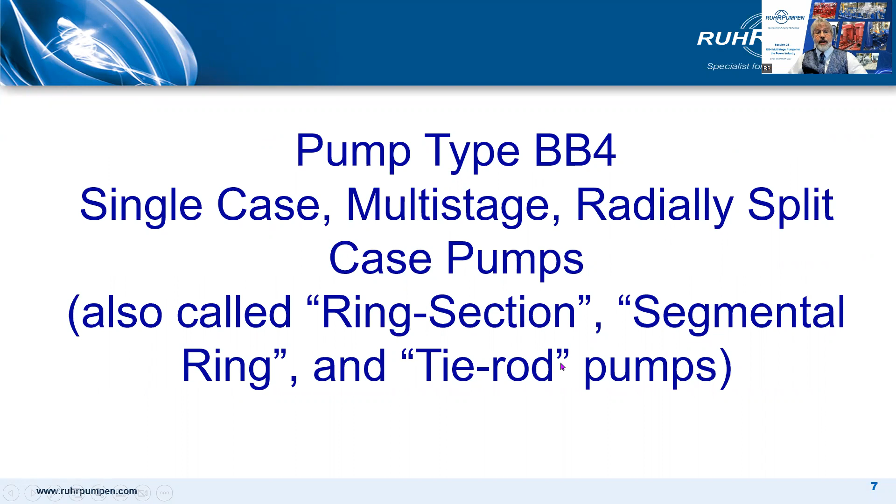BB4 pumps, described in API 610 as single case, multi-stage, radially split case pumps. But they're also popularly known as ring section pumps, segmental ring pumps, and tie rod pumps. Here's a photo from a recent order, and you can clearly see why it's called a ring section pump or a tie rod design.

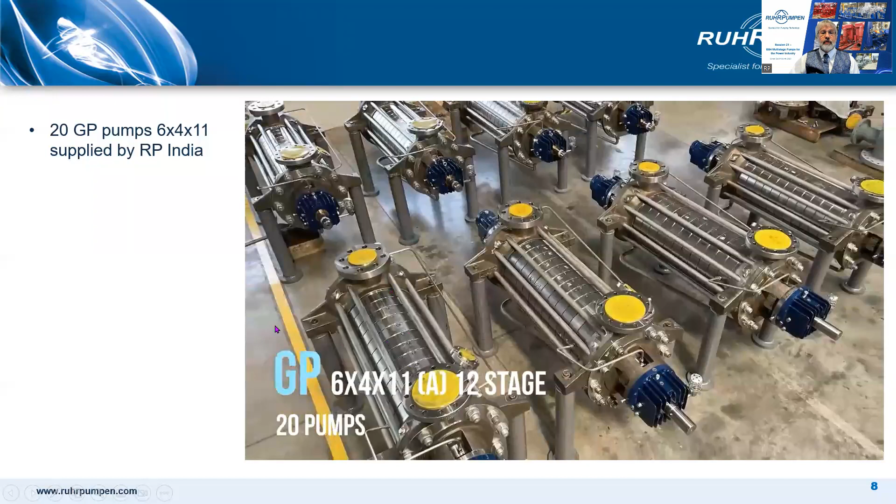Before I look at the design of these pumps in detail, I want to talk first about the industry in which they are so prevalent, the power industry, as boiler feed pumps, particularly combined cycle power plants. When you understand the market they're going in, you'll better understand the design features we've built into them and why.

In a single cycle gas plant, a gas turbine burns natural gas and drives a generator to produce electricity. The hot exhaust gases go to waste. There's no waste heat boiler, so no boiler feed water pumps. In a combined cycle power plant, a gas turbine generator generates electricity and the waste heat is used to make steam to generate additional electricity via a steam turbine. And this last step enhances the efficiency of the electricity generation no end.

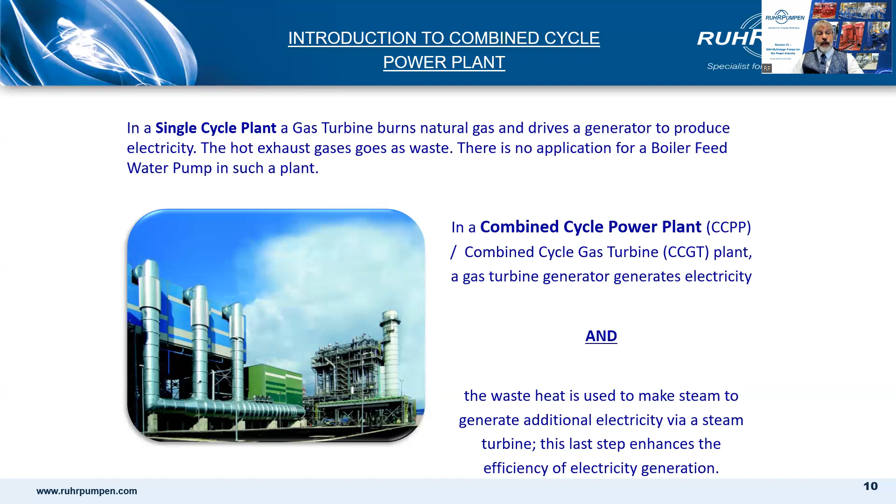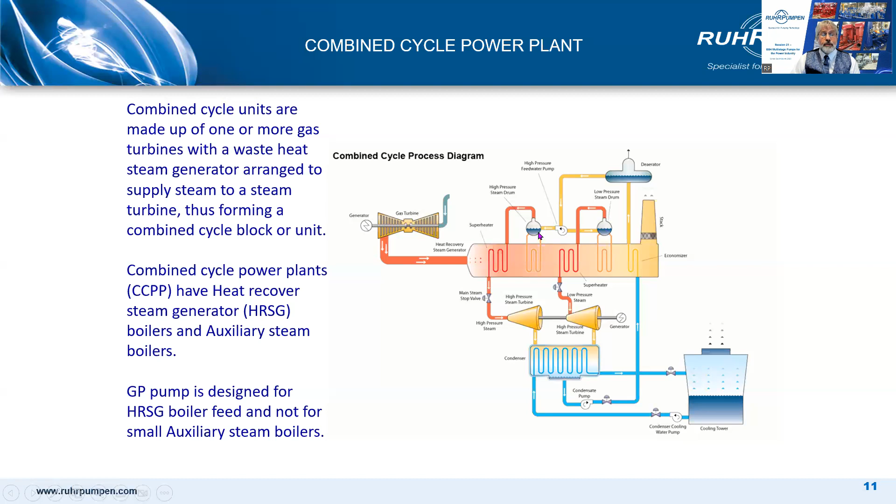In a combined cycle power plant, the exhaust gases go to the heat recovery steam generators, which are fed by boiler feed water pumps. And generated steam goes to the high pressure and low pressure steam turbines, which generate additional power. The exhaust steam is condensed and goes round the circuit again. Note the high pressure and low pressure steam circuits are fed by the same pump. Now we'll cover that later.

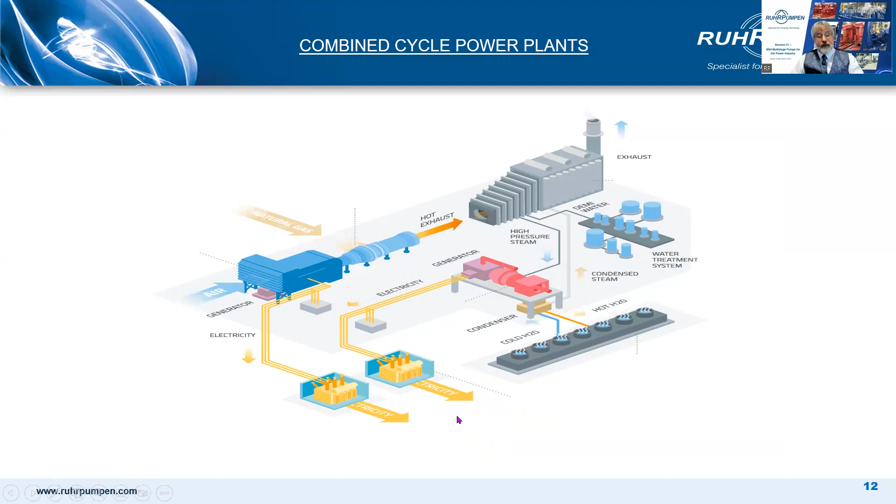Here it is schematically. Air and natural gas go into the gas turbine, which generates electricity. The exhaust gases go to the heat recovery steam generator. High pressure water goes in, steam comes out to the steam turbines, which generate more electricity. Well, that's it in a nutshell.

Combined cycle gas plants are increasing in popularity. They're more efficient than coal-fired plants. Modularized plants are available almost off the shelf and are considerably cheaper than coal-fired plants. And they're politically popular in times when the world is looking at reduced emissions.

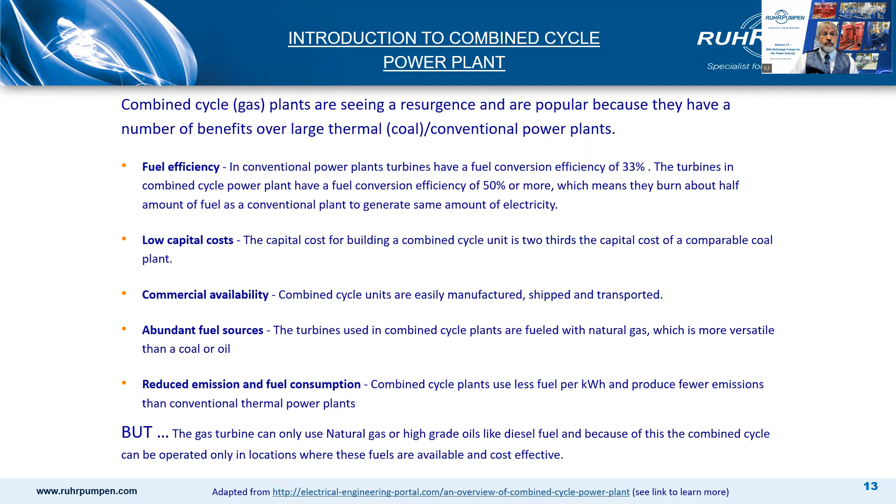I'm not going to play this video now, but here is a link to a short video which runs for about 3 minutes and gives you a good overview of combined cycle power plants.

So what is a boiler feed pump? It's a high pressure, multi-stage pump that runs continuously to pump feed water to the heat recovery steam generator. Usually it will be a BB4 pump, as we're describing in this presentation. It can be a BB5 pump, which is a double case barrel pump, you'll remember. And this may be specified by some customers, particularly oil and gas companies like Shell, Exxon, or Linde.

Traditionally, on baseload plants, the feed water pumps run continuously with few starts and stops. But increasingly nowadays, gas-fired power stations are used as peak shavers alongside renewable energy plants. And so they're seeing far more frequent stops and starts and thermal cycling. This is a more exacting requirement for the pumps to be designed to withstand.

Normal material of construction is C6 due to strength and corrosion resistance, but as you see, they're also available in other materials. It's not a difficult or exacting sealing proposition, so normally a single seal with a Plan 23 flush piping is used. Plan 23, you'll remember, is continuous recirculation from the seal chamber through a heat exchanger back to the seal chamber.

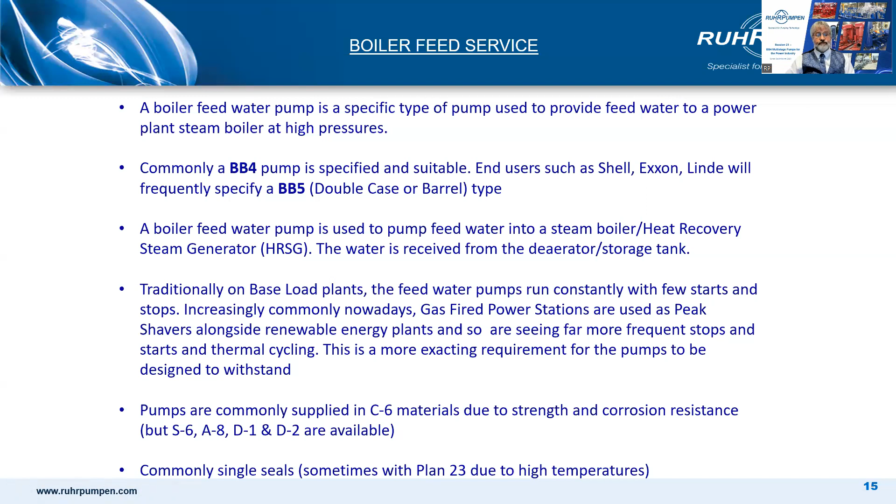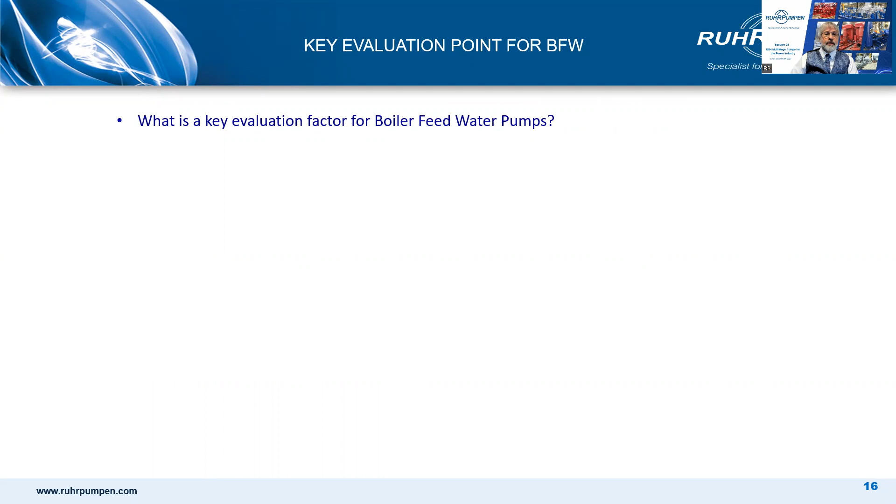What is the key evaluation factor for boiler feed water pumps? Efficiency, every time. Better efficiency equals more electricity equals higher profit. Efficiency and life cycle cost will frequently be more important than the capital cost of the equipment. So efficiency is most critical. But I want you to think about two different concepts of efficiency: high initial efficiency and high sustainable efficiency.

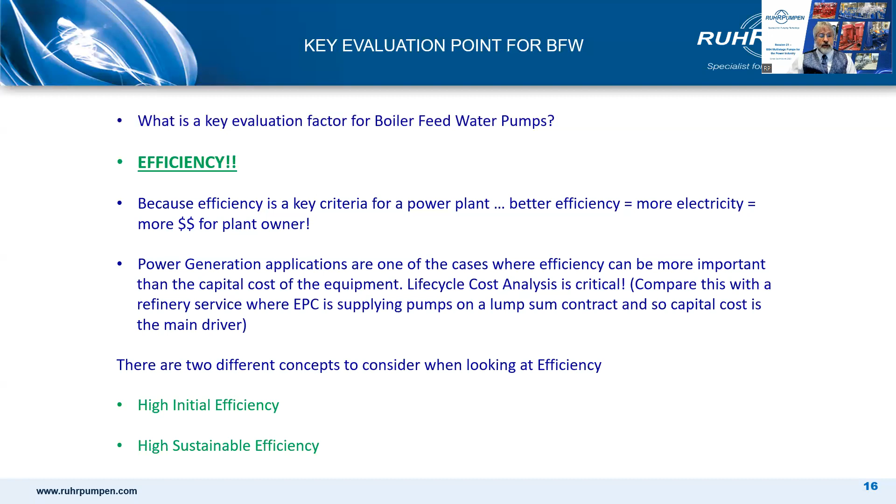Let me illustrate this by an example. I'm going to show you two different pump selections. The first one has a higher specific speed, higher number of stages, 13 in this instance, and a longer, skinnier shaft. Efficiency 81.7%. The second has a lower specific speed, fewer stages, 8 in this instance, shorter, more rigid shaft, and apparently a lower efficiency of 78.7%.

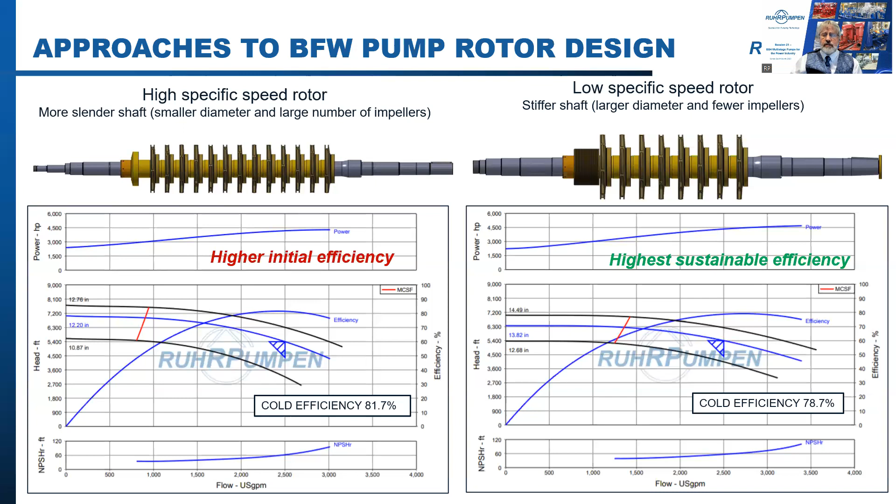Which one do you buy? Well, if you're an EPC with a lump sum turnkey contract, it's a no-brainer. You buy option 1. If you're an end user or a consultant looking for the best long-term solution, you'd be wise to say, hold on a minute, let's look at this a bit more. So let's look at it a little deeper.

Here on the left is the high specific speed rotor. It has a longer shaft span between bearings, skinnier shaft, more shaft deflection or sag when at rest, and is more likely for the wearing faces to touch during startup or rundown. It's reliant on the Lomakin effect to effectively reduce the effect of the shaft sag. Lomakin effect? I'll come to that in a minute.

Here on the right is the low specific speed rotor. Shorter bearing span, bigger diameter, stiffer shaft, less sag, less dependent on the Lomakin effect. It's what they call a non-contacting rotor, and this is a term you will see in specifications.

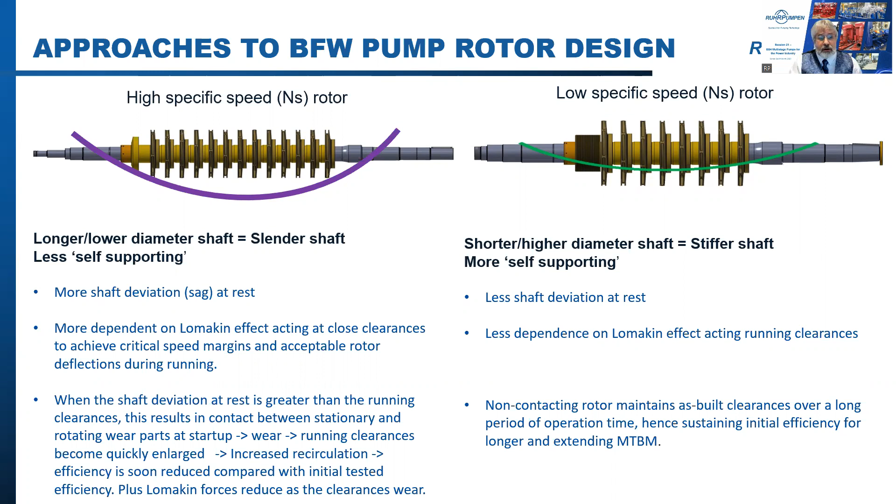So what the hell is the Lomakin effect? It's another of those terms, like Bernoulli, that has pump people looking wise and nodding sagely. Meanwhile, others with less theoretical knowledge say, what? Well, here it is in a very simplified form. If you're a rotating equipment engineer, then you ought to read up on this and Bernoulli while you're at it. But this will do for most of us generalists.

In any wear ring or bushing with differential pressure, there'll be axial flow passing through the clearance. If the rotating part moves away from the center of the stationary part, there'll be different clearances on each side. So when you get sag, you've got bigger clearance at the top, smaller clearance at the bottom. The side with the greater clearance will pass more flow than the side with the tighter clearance. More flow passing through the clearance will result locally in a higher velocity, and hence the effective local pressure will be lower. So you're going to have lower pressure at the higher part of the rotor.

Now this effect tends to be stabilizing. The force of the lower pressure on the side with a larger clearance, at the top in other words, and higher pressure on the side with a tighter clearance at the bottom, make the rotating part want to move back towards the center. In effect, the wear ring or bushing becomes a stable bearing. This reduces the chance of rub even with a flexible rotor, but not at startup and rundown. This is when wear rings and bushings might touch.

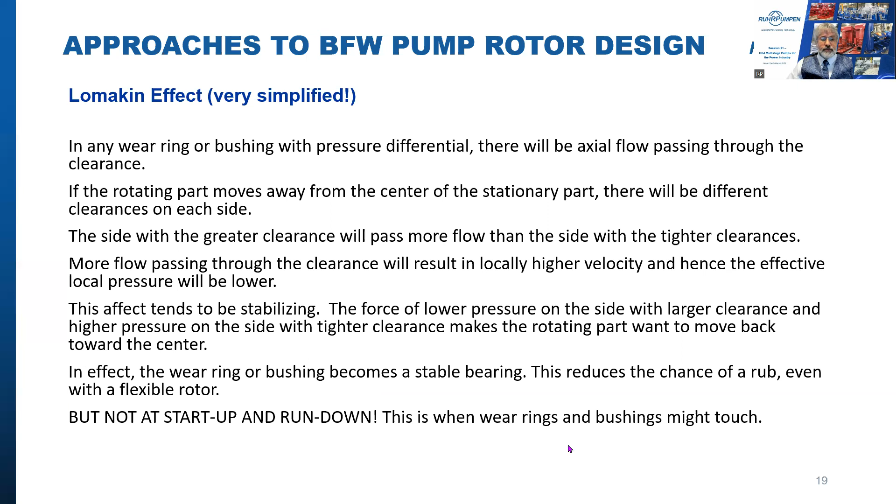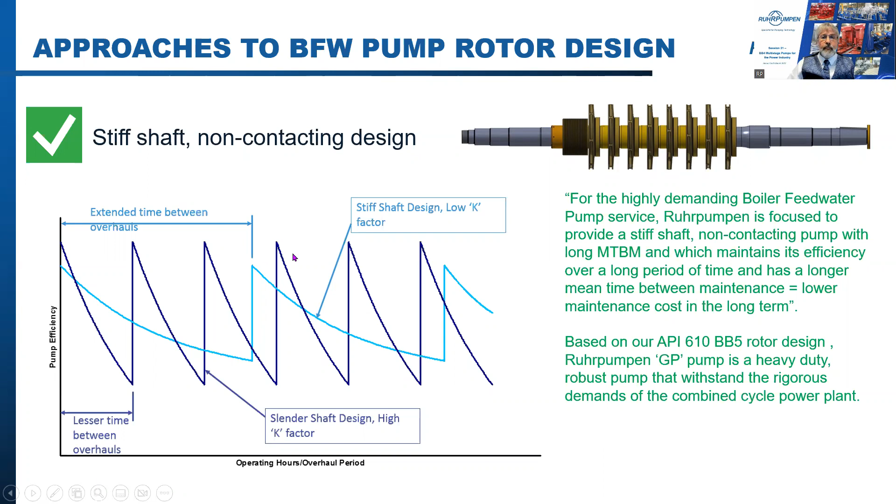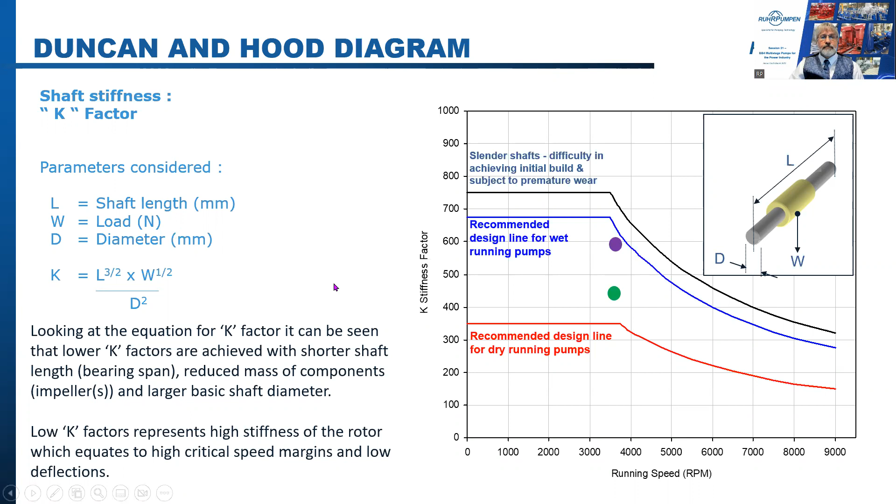Again, to reiterate, the lower the K factor, the stiffer the rotor, and lower the shaft deflections. Hence, a non-contacting rotor is what we're looking for. Well, that's the difficult bit over. Let's move on to the pump design and features.

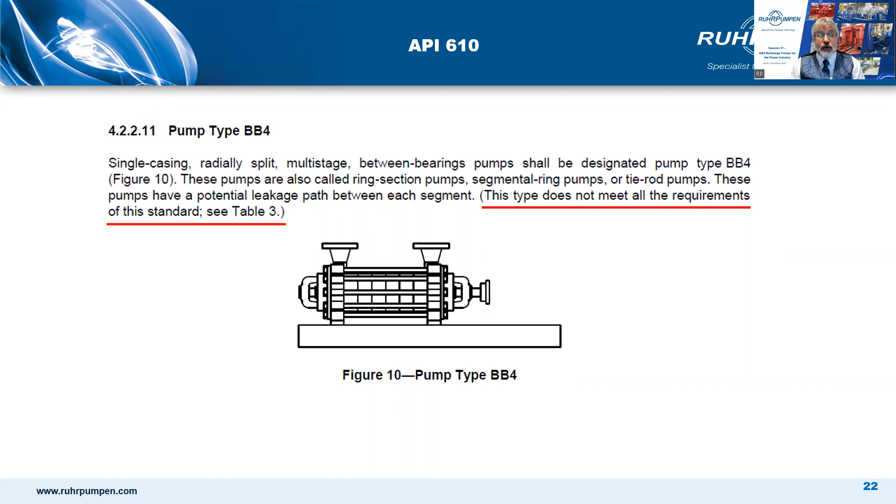Firstly, what does API 610 say? Well, a BB4 pump is not fully compliant with API 610. This is generally fine as we're pumping hot water, not hazardous hot hydrocarbons. Most specifiers don't require API 610 compliance for boiler feed water pumps. So we start with a build that is fit for purpose and still gives you a high quality pump without unnecessary and costly features.

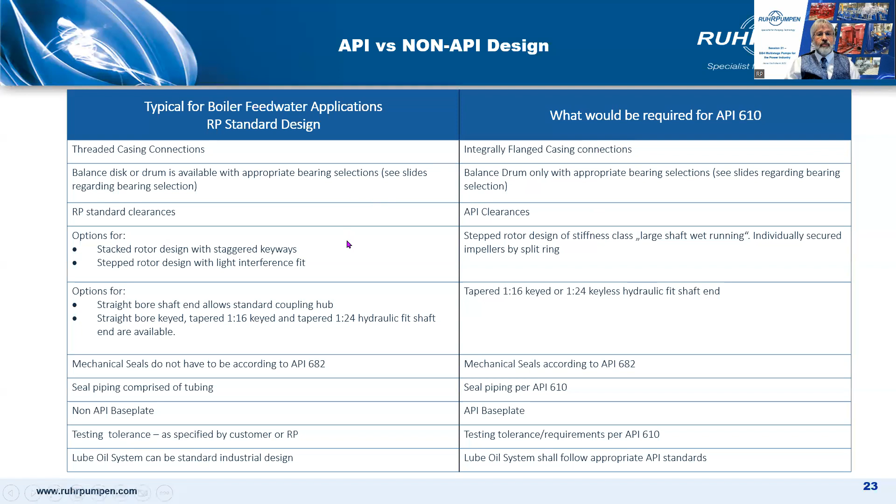Well, this is the Ruhrpumpen model GP pump for boiler feed water service. It's based on our market-leading BB5 pump hydraulics, our barrel pump hydraulics. It's a ring section pump, tie bolt design, here centerline mount, and here shown with an interstage takeoff, a low pressure takeoff.

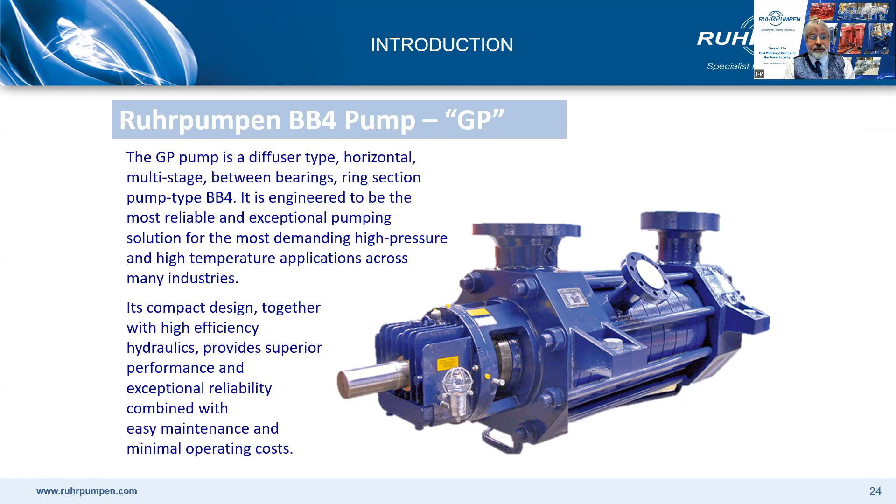The hydraulic design, well, it's designed for 2-pole, 50 or 60 hertz. It's not a high-speed pump. We have high and low flow impellers available for each pump size, which is good for retrofits and re-rates for duty changes in the future. We have low NPSH first stages available, and we have designs for interstage takeoffs.

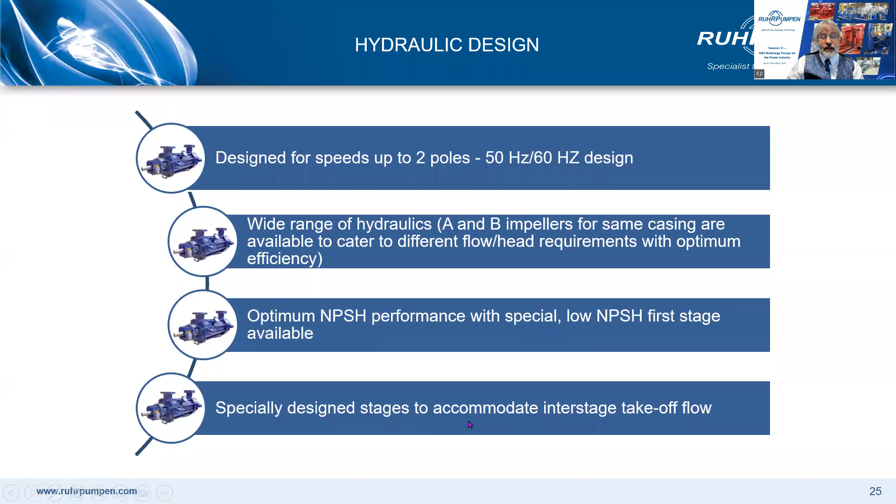The hydraulics have been and continue to be optimized by CFD, computational fluid dynamics, to maximize the efficiency. And this is an ongoing, continuous improvement.

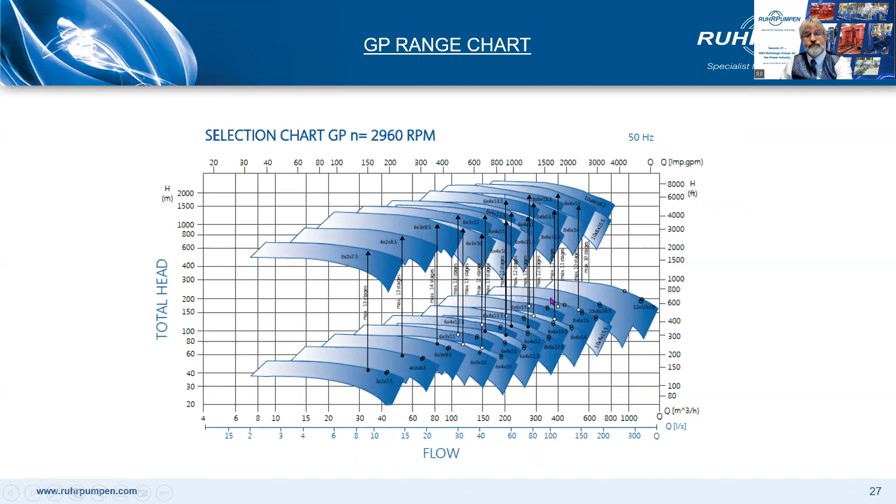Here is the range chart at 50 hertz, so flows up to 1200 cubic meters an hour and heads to about 2000 meters, 200 bar. Or at 60 hertz, flows up to 6,600 gallons a minute and heads up to 10,000 feet, not 1,000 feet, 10,000 feet.

We have 3 mechanical design standards, and each can be upgraded to the next level. You can pick and choose features that you want without necessarily going the full API route.

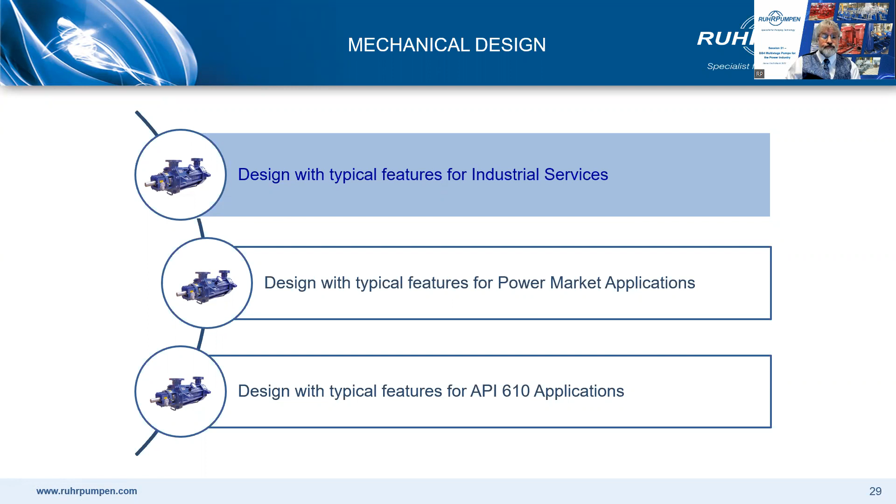It's centerline mount, and the flange ratings, 600 pound, 900 pound, 1500 pound, or 2500 pound. So that's around 350 bar, 5000 PSI in C6 construction. Suction side is good for about 50 bar in C6 again.

Confined O-rings sealing each stage. So we have metal to metal, face to face with confined O-rings. Various materials of O-rings according to service, maybe NBR, acrylonitrile butadiene rubber, or EPM, ethylene propylene rubber, EPDM, ethylene propylene diene monomer rubber.

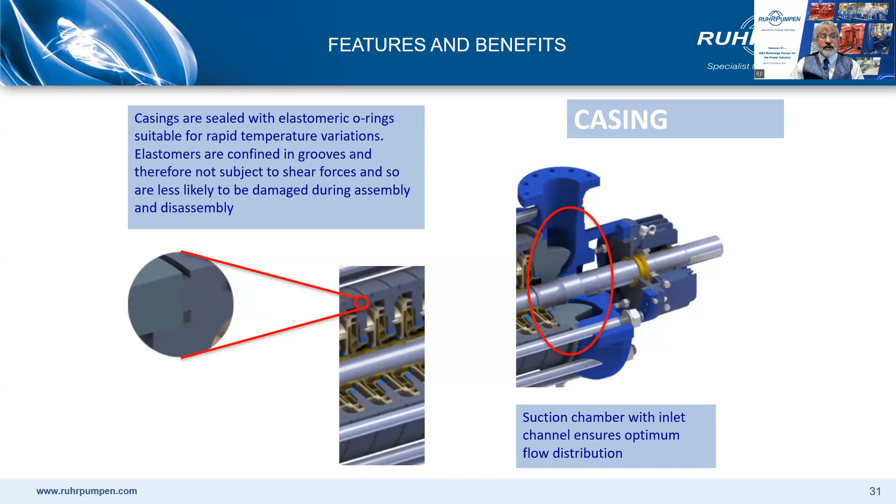They're the most common ones, I think, those three, but at higher temperatures, FKM, fluorocarbon rubber, FEPM, tetrafluoroethylene propylene, or FFKM, perfluoro rubber, and these are more expensive. We have an optimized inlet channel to ensure good flow into the impeller, and you saw this in the earlier slide on suction chamber CFD design there.

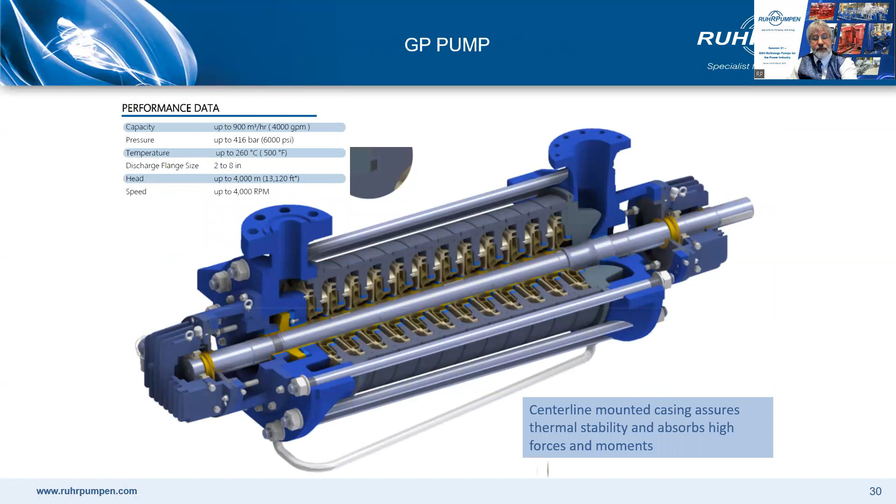We have investment casting impellers, which optimizes the efficiency and the repeatability. Shafts, impellers, and complete rotors are balanced to ISO 1940 G2.5. We have high and low flow hydraulic versions of each pump size.

And this is important, as I've said a few minutes ago, for retrofits and re-rates and for interstage takeoffs, which we'll come to in a few minutes.

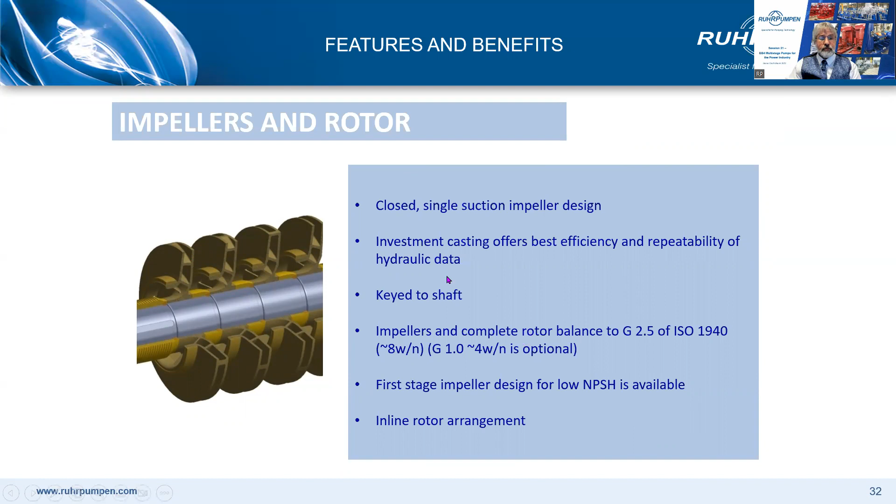Impeller mounting and shaft: we have two designs. One with a straight shaft and sleeves securing each impeller, used on the smaller, lower pressure pumps. The second is the API version with stepped shaft and impellers individually secured by split rings, used on larger, higher pressure pumps and whenever API 610 is specified.

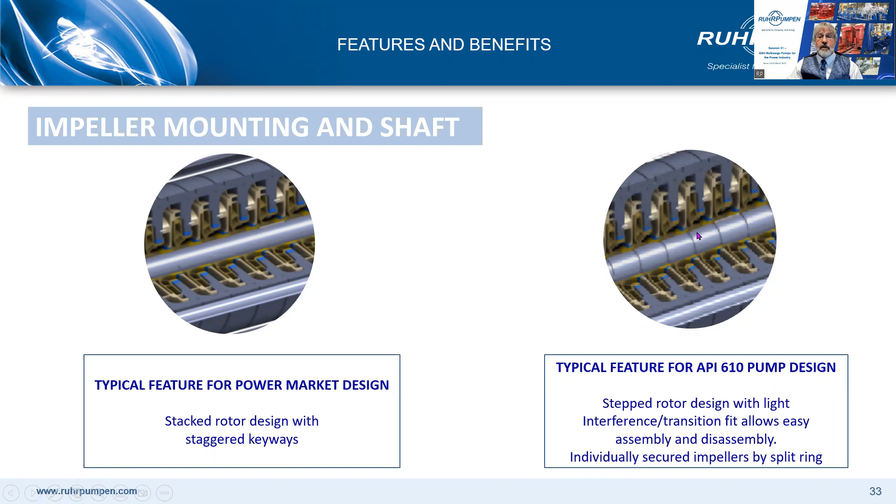The wear rings. The base design case is case wear rings only, no impeller wear rings. We run with closer clearances than API for optimum efficiency. Impeller wear rings can be fitted later as wear occurs. At the first service, for example, you can machine the impellers to take wear rings at that stage.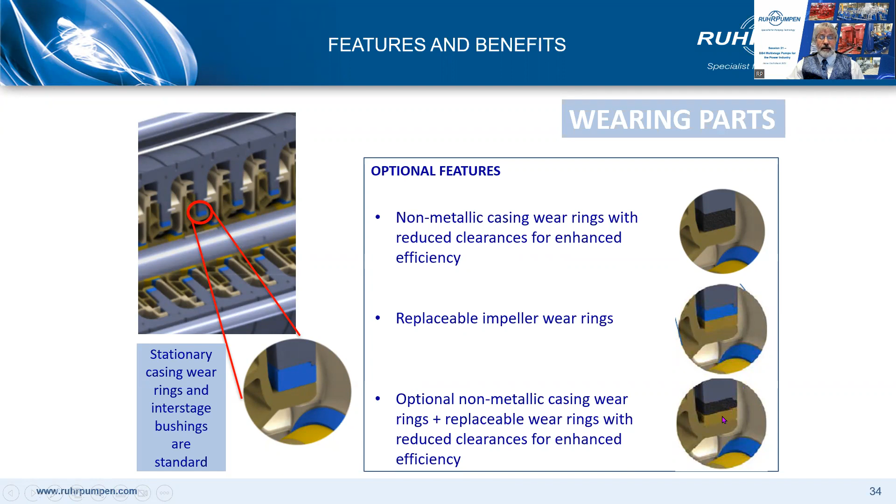Here is the bearing housing. It's a 360-degree one, rather than the 180-degree one that some of the older pumps in the industry you might find. Has vertical fins to provide optimal cooling.

Here you see the radial bearing. It's a single row cylinder roller, anti-friction bearing with splash oil lube and a constant level oiler. And we have an Inpro bearing isolator.

If you choose, or if you need, the option of a tilting pad, hydrodynamic or Kingsbury bearing, you'll need a force feed lube system, in which case we have available this shaft-driven main oil pump to replace this assembly.

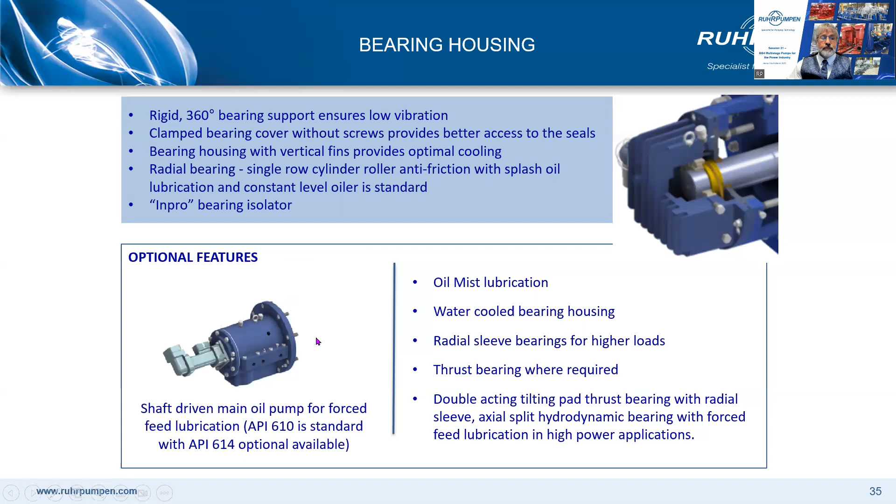So that brings us neatly to hydraulic balancing, thrust balancing. With a BB4 pump, you have stacked impellers, all facing the same way. So the thrust builds up and is more than a conventional thrust bearing, a ball bearing can take.

So there are several ways of handling this thrust. You can have opposed impellers, 5 facing one way, 5 facing the other, thus equalizing the thrust. This is commonly done on BB3 and BB5 pumps. But on BB4 pumps, we use either a balance disc or a balance drum.

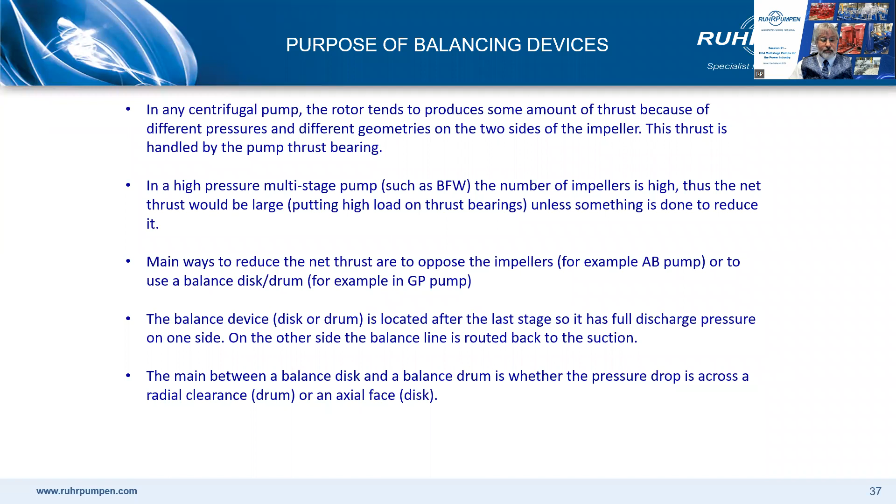Here is the balance disc. You have full discharge pressure acting on one side and suction pressure acting on the other side because of the balance line back to suction. The pressure, the thrust, is broken down by close axial clearance between the two faces. It balances out 100% of the thrust, so no thrust bearing is required, just a radial bearing.

A little clearer in this slide, suction pressure this side, discharge pressure this side, the pressure breakdown across this face. And the close clearances, though, mean it is only suitable for clean fluids, so it's ideal for boiler feed water pumps.

API 610 is written with process fluids in mind, which frequently contain solids, and this design is unsuitable for that. So that's why API 610 has a blanket ban on balance discs.

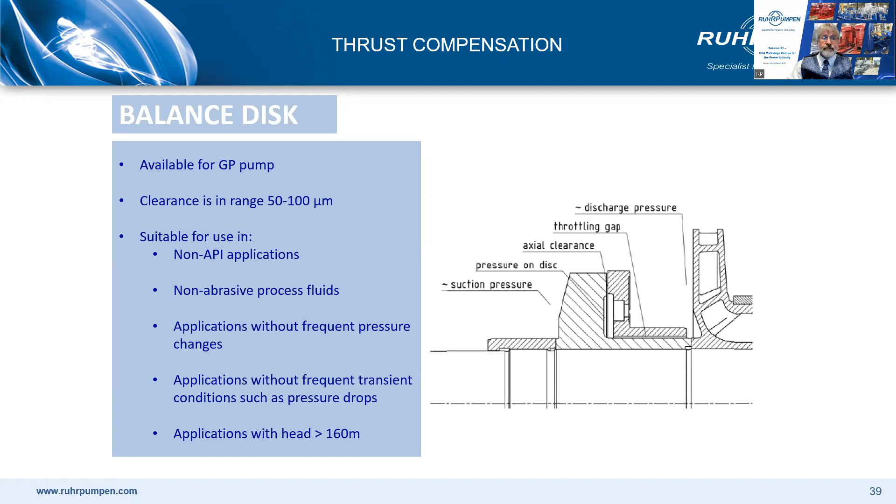Here in this sectional, you can see the balance disc. And here you see the balance line, which means you have suction pressure here, of course, on the suction side of it, but also here on the discharge end.

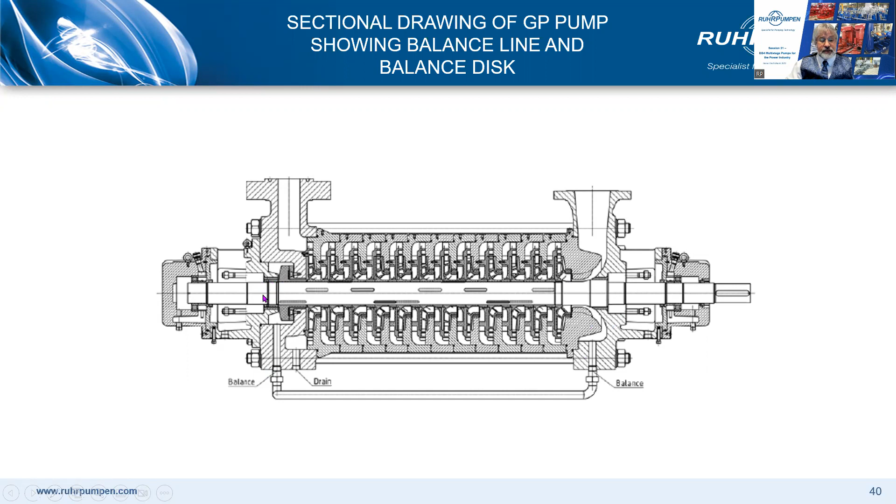With the close clearances, there is risk of the faces touching and wearing prematurely, especially during frequent startups and shutdowns. So there's an option of a lift-off device comprising a preloaded spring and an angular contact bearing to ensure that the thrust disc faces are held open during startup and rundown. And this is an option which many manufacturers offer.

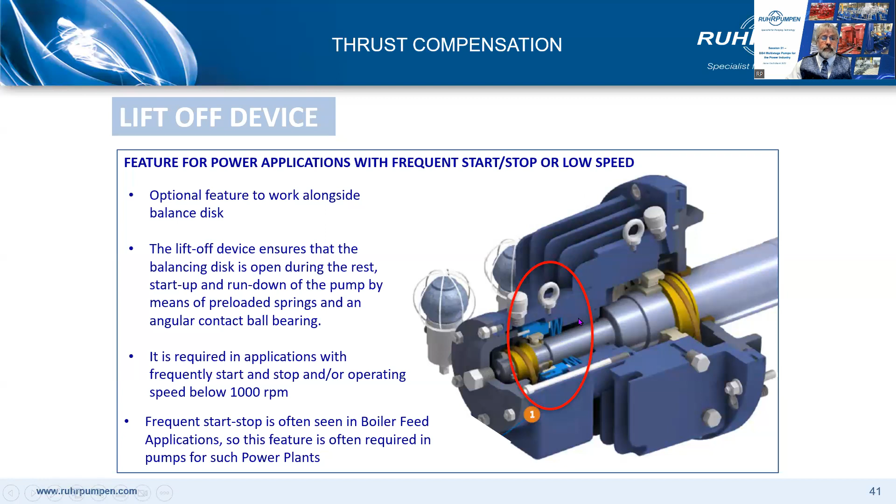Here is the alternative thrust balancing mechanism, the balance drum. And this is required for API 610 pumps and whenever there are solids in the pump fluid. Thrust is broken down in the radial direction. It has greater clearances because of the solids handling capability. And so with those greater clearances, it only breaks down 85 to 90% of the thrust. So you need a thrust bearing as well.

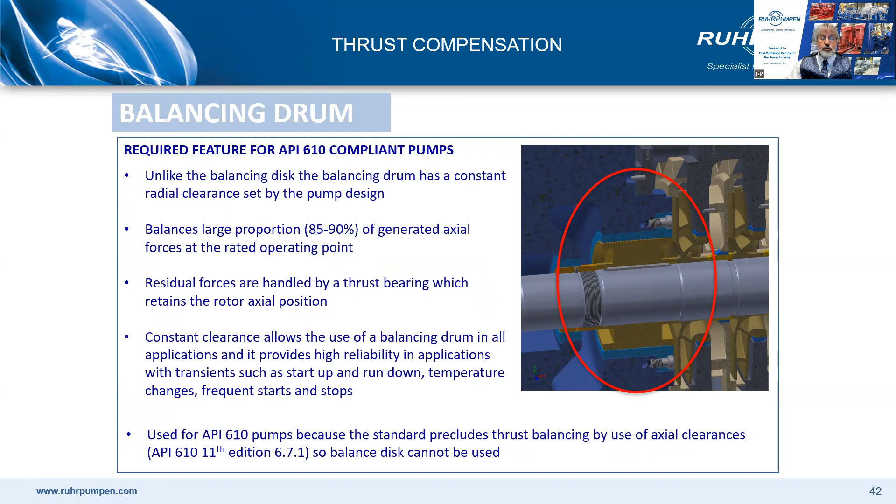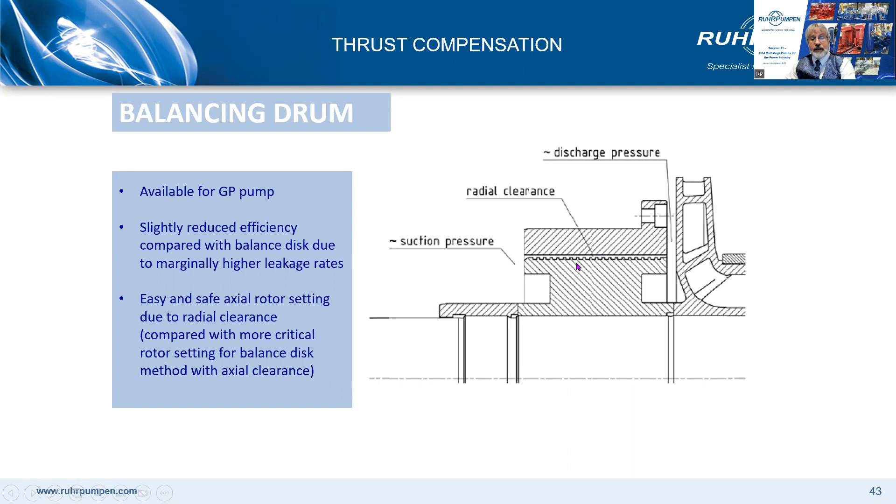Here we see we've got discharge pressure this side, suction pressure this side, and here is the breakdown of the pressure. It's not as efficient as the disc, but it is better for solids handling.

We have several bearing combinations according to needs and preferences. Here is the simplest and least expensive, used with the balance disc. No residual axial thrust to balance, only radial loads, the weight of the rotor. So it's a simple ring oil lubricated roller bearing. If you prefer, on larger sizes particularly, a hydrodynamic bearing, a sleeve bearing, again, ring oil lubricated.

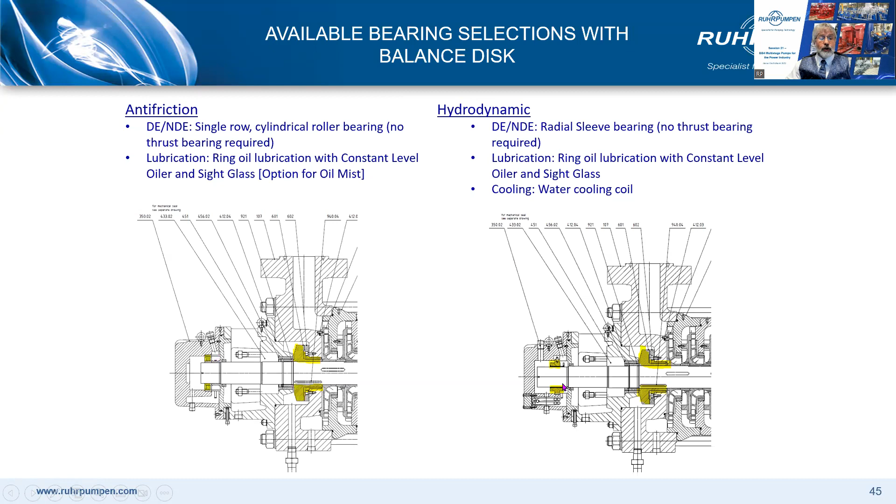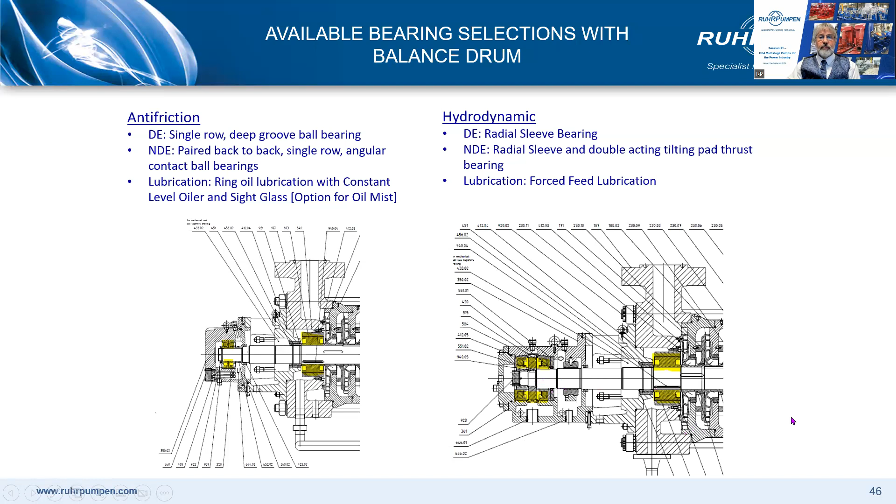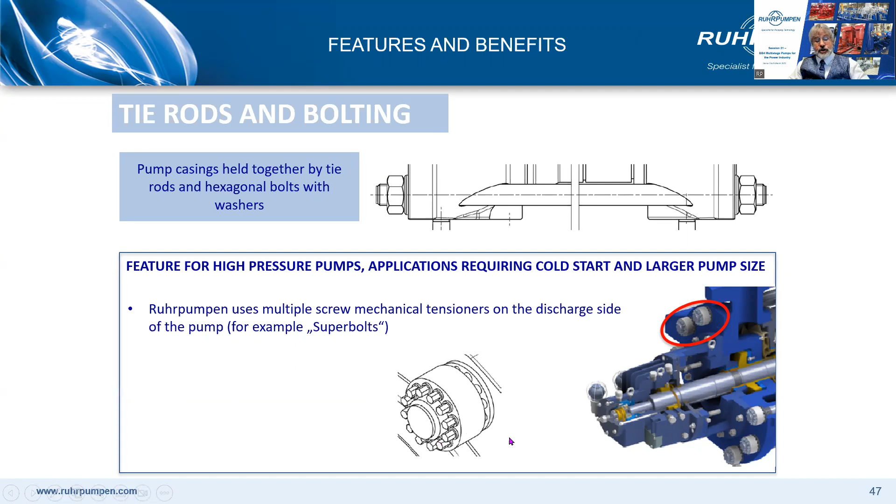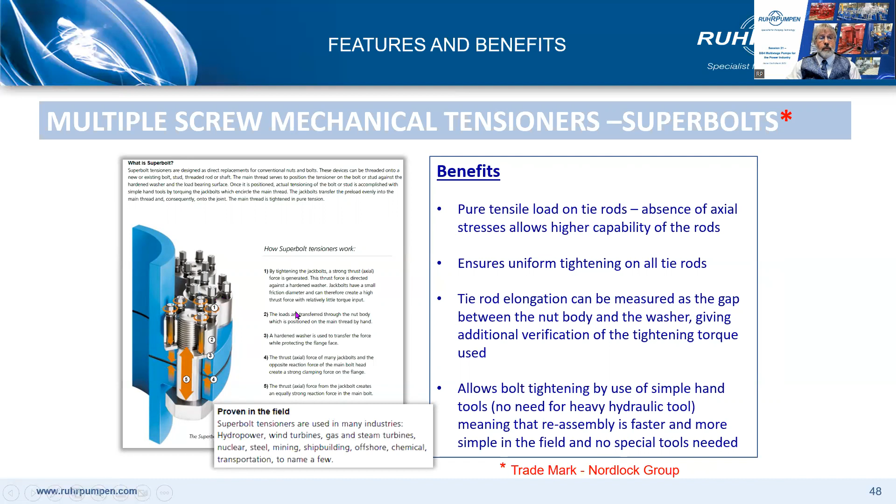This is just the coolest thing I ever saw, multi-jack bolt tensioning. It's widely called super bolts, although that's actually the trade name of Nordlock. Other manufacturers of multi-jack bolt tensioning exist. It allows you to tighten the bolt or nut using conventional hand tools instead of a hydraulic bolt tensioning tool. You tighten the nut by tightening each of the 6 jack bolts in turn using conventional hand tools. Or you can buy a super bolt tool to make it even easier, which tightens all 6 of them together.

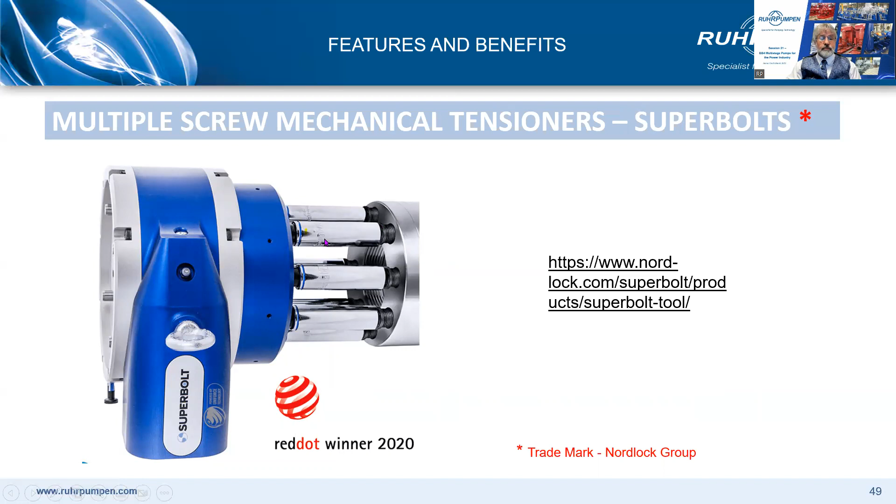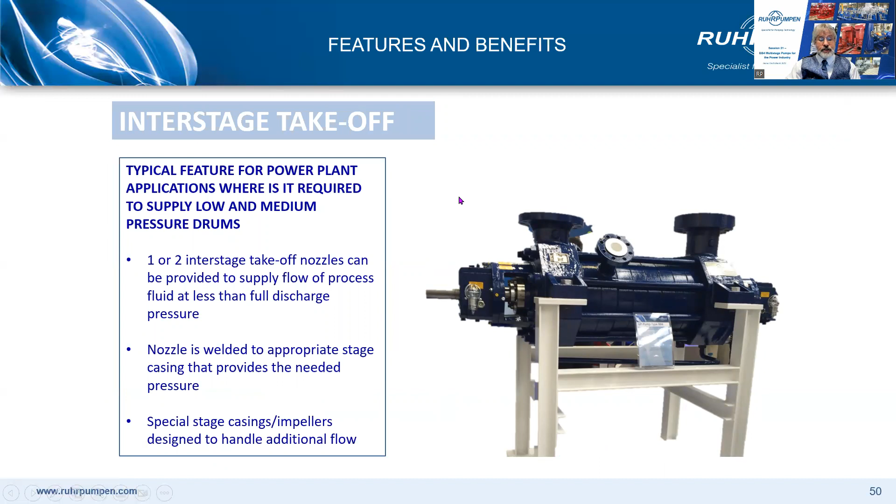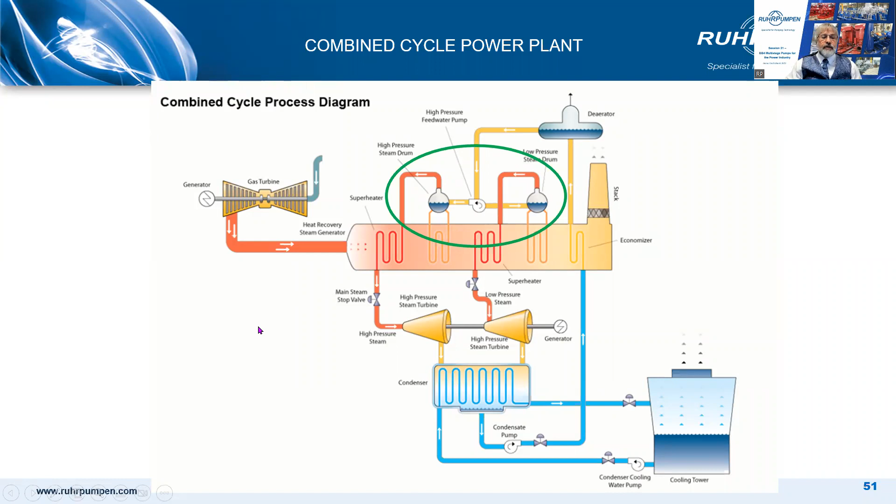Let's look now at the interstage takeoff. You may recall back at the beginning of this presentation, I showed you this process schematic. It shows the boiler feed water pump feeding both the high pressure steam drum and the low pressure steam drum. Well, here is how that is achieved: an intermediate pressure takeoff at the appropriate stage of the pump. It means the impellers of the first few stages are designed for the full flow, and after the takeoff, they're designed for the reduced flow. This is one reason why we have several impeller hydraulic designs for each pump size.

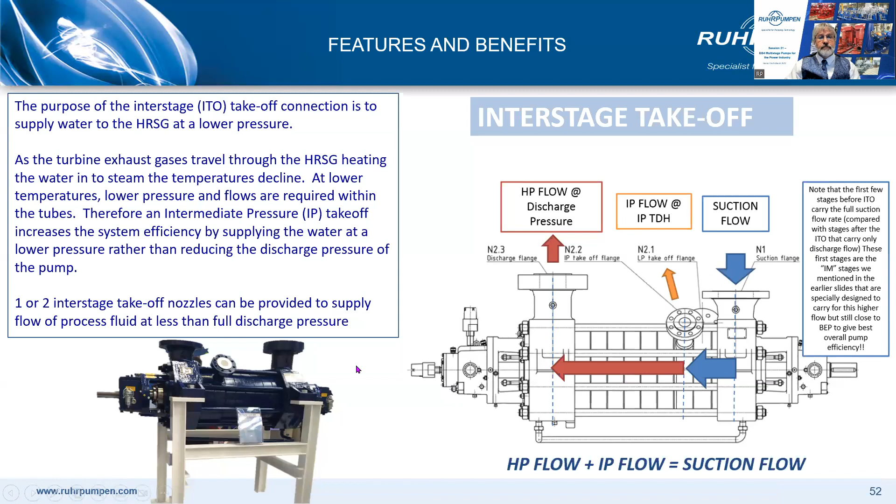So who makes BB4 pumps of this type? Well, you know that Ruhrpumpen makes them, I told you that already. Who else are the big players in this field? In this market, the heavy-duty, high-pressure pumps, the main players are Ruhrpumpen, Sulzer, Flowserve, KSB, SPX, Torishima, and Ebara.

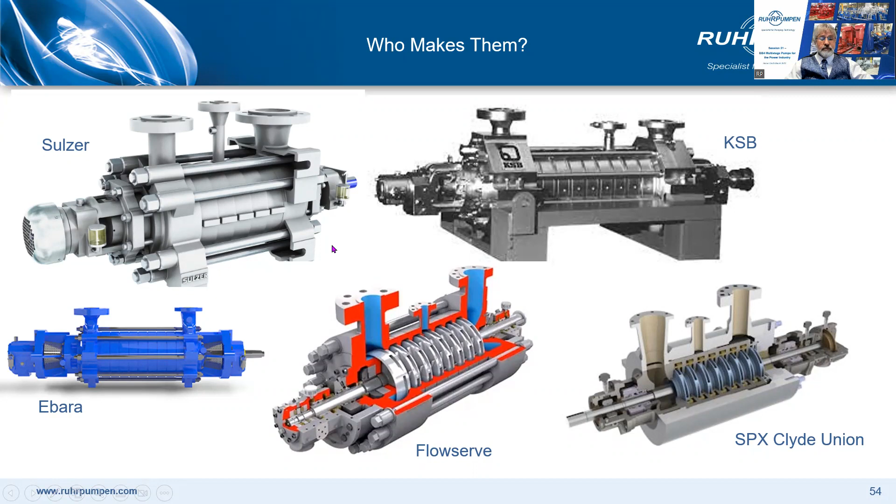And finally, for today, be aware there are many pumps other than boiler feed water pumps on a power station, and we can help you with all of them: condensate pumps, cooling water circulation pumps, boiler feed water pumps of course, utility pumps, and fire pumps.

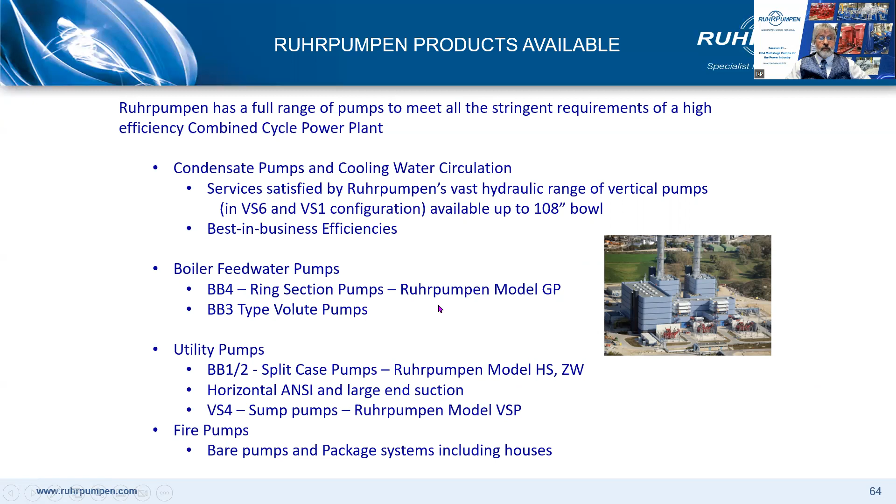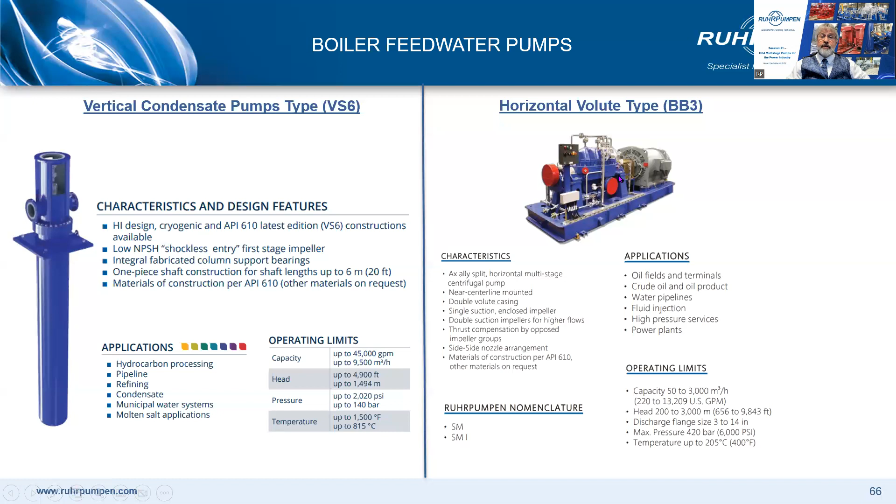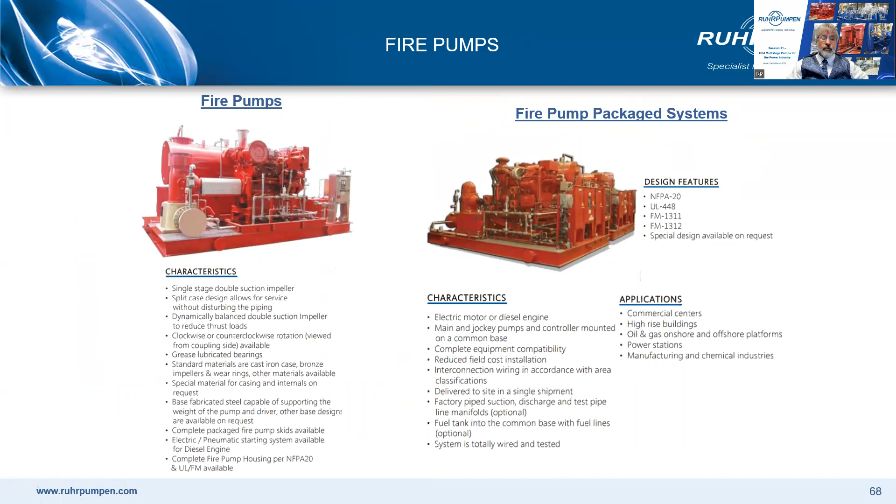General service pumps, fire water pumps. And we can also help you with packaging of pumps into skids or modules.

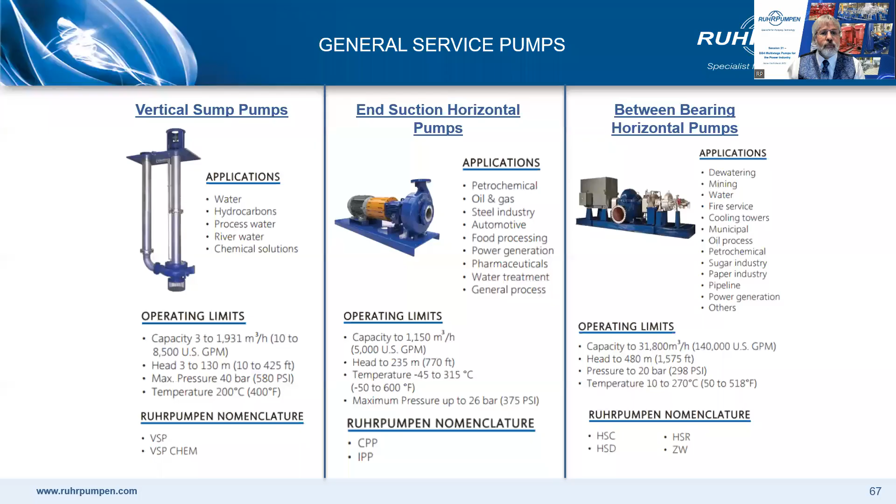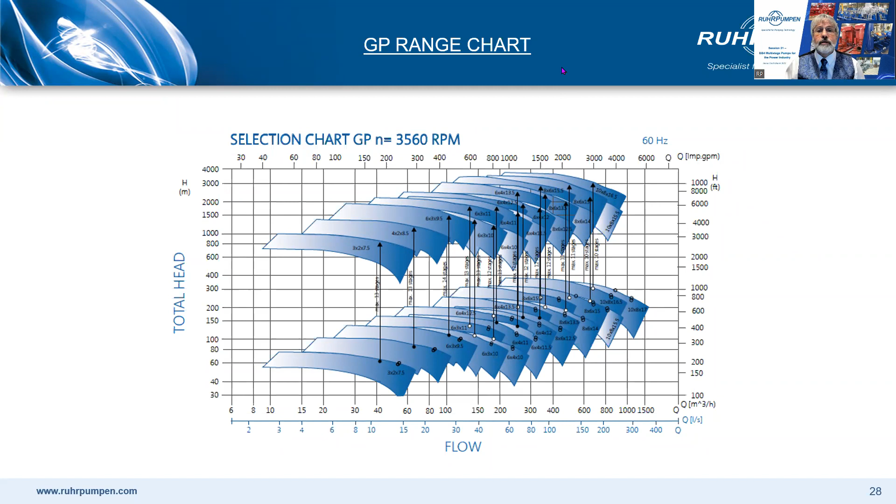This is just the area bound curves, sometimes called tombstone curves. What we're looking at here, the black lines with arrows, shows the best efficiency point with a full diameter impeller for each one. So you can see where the best efficiency point is. Of course, these area bound curves just show you the range. You would actually get a specific pump curve for your particular duty.

Another anonymous attendee asked, do I need to be concerned with Lomakin effect on every pump? If not, when? Is Lomakin effect specific to BB4, or does it also apply to centrifugal pumps? Good questions. The Lomakin effect would also apply on any multi-stage pump, so a BB3 pump or a BB5 pump.

It's worth considering because some people might give you a long skinny shaft pump that is of questionable suitability for the duty. You pays your money, you takes your choice. You can buy a cheap and cheerful pump that might have short life or short mean time between overhauls, or you can have a more rigid, rugged design that will last longer between overhauls, but you'd be paying more for it. That was the purpose of the illustrations I gave with option 1 selection and option 2 selection. Option 1 will be cheap initial cost but higher long-term cost, because it'll be in the repair center more frequently than the more expensive stiff shaft construction pump.